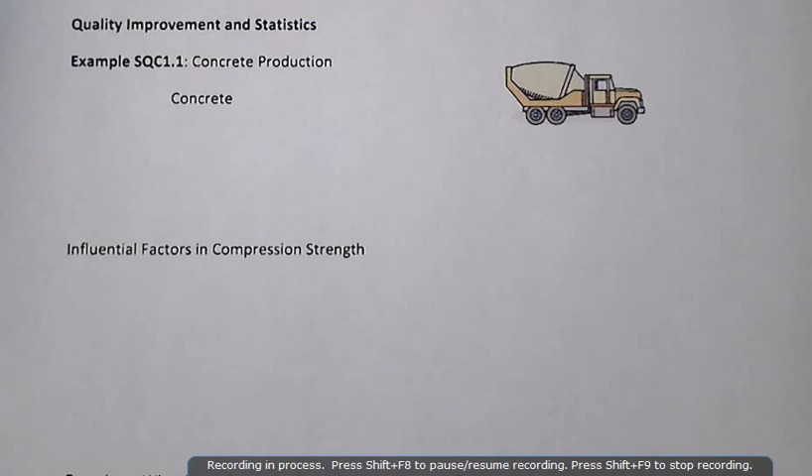We all want quality, we all think we deliver quality, but of course there's this big, great question of what is it, and can we all agree on it? And we tend to think that it's gold plating, and we're going to find out that from an engineering and management kind of perspective, that that's not actually at all what quality is.

We're going to get into how we use statistics to improve quality by looking at another area that has a lot of misnomers and a lot of misconceptions, and that is the production of concrete. To get there, because you're not all concrete materials engineers, we need to talk about what exactly concrete is and what it isn't, as well as introduce some of the areas where we have significant variability that comes along from the standpoint of natural variability, as well as variability that's really associated with man-made causes.

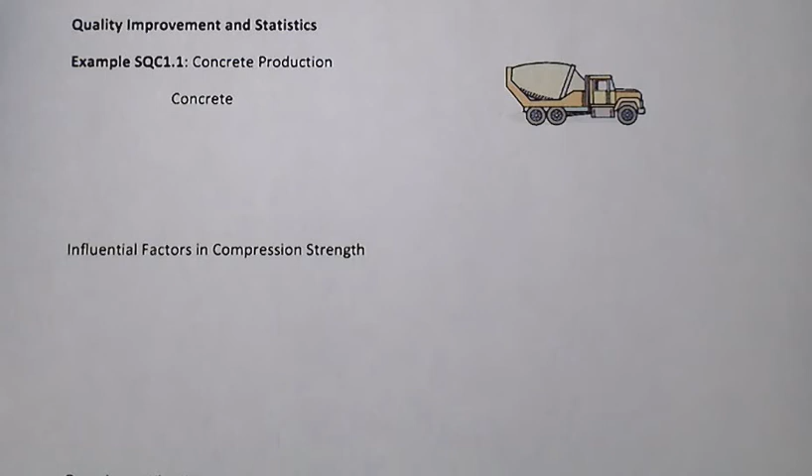And that paradigm is going to actually be pretty important for us as we not only talk about statistical quality improvement, but when we get into the next module, which will be analysis of variance, that'll come back as a pretty strong, important component as well. So let's talk a little bit about what concrete is, and that's going to lead us to a little bit of what it's not. An important aspect about concrete is that it has 4 primary ingredients, and really it needs 2 at the very heart of it, and that is cement and water.

Now, people on the street, so to speak, pardon the pun, will say, "Oh, I skinned my knee on the cement." The reality is that no, you did not. You skinned your knee on concrete. You cannot skin your knee on cement, and that's because cement is a powder. When we say cement, we almost are always talking about Portland cement, and Portland cement concrete is the combination of cement and water that then also has a whole bunch of what we call aggregate, as well as these days almost always some set of what we call admixtures.

The cement is essentially like a flour. The approximate analogy you can make is making a cake here.

And if I had anything better than my horrible high school French accent here, I would go into my French chef. I could probably do a Swedish chef better than a French chef here.

And so the cement is a lot like flour, and in many ways does the same thing in its combination with water. But it's only an approximate analogy here. What really is happening is that through what's called the hydration process, the cement and the water react in an exothermic reaction, generating quite a bit of heat, which as a part of production of concrete is important, particularly when we get to the construction site, and if we're dealing with mass concrete, that's a very important issue.

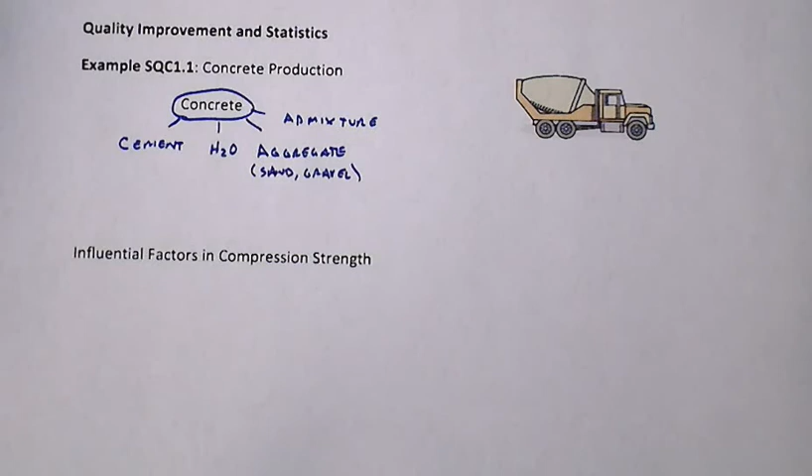But a little bit unlike the cake analogy, we put a whole lot of aggregate, which is just a general term for the sand and gravel that we put in there, that although it has some other properties for us in terms of stabilizing the mix and also providing some strength to the final product, it really, at the end of the day, is inexpensive filler, or what I like to say, it's dirt cheap.

Yes, that was a bad pun. A lot of people will call sand and gravel dirt. It's only dirt when it shows up on your parents' kitchen floor and it's tracked in, but out there in the world, this is aggregate, and it's not dirt. Dirt's a 4-letter word, and sand, yeah, I know, it's a 4-letter word too, but it's a good 4-letter word,

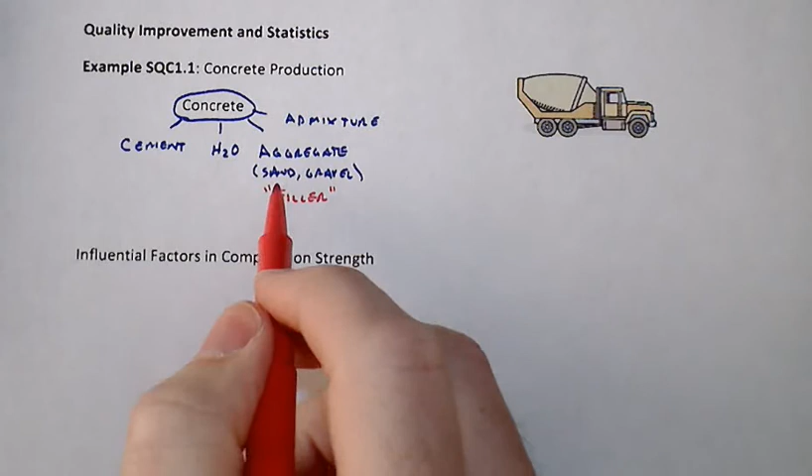and particularly because it's inexpensive filler, because Portland cement is quite expensive to both produce and to provide into this particular mixture. The cement and the water are going to combine to make concrete that is holding all this other stuff together. Now the admixtures here are essentially your spice that you add to your cake.

We do all kinds of different things. It might be a coloring admixture. There are all other kinds of admixtures that are there to speed up, say, the chemical reaction, speed up the strength gain. There are also sometimes what are called superplasticizers that help to make all of this conglomeration, instead of like a thick viscous peanut butter when it gets delivered to the site, a lot thinner, and being thinner means that it is easier to work with.

But there's a sacrifice that comes at the cost of oftentimes making something thinner, and certain superplasticizers can do that without having that disbenefit that we'll talk about here in just a moment.

Right, so it's important for you to not sound like just a common garden variety person on the street. When you walk across, roll across, live in structures that are supported by concrete, you can hurt yourself on concrete, absolutely, but you can't skin your knee on cement. You can only skin your knee on the concrete.

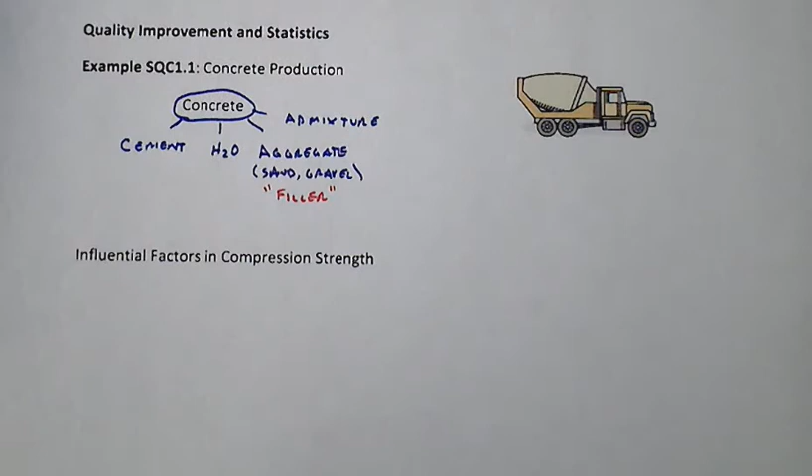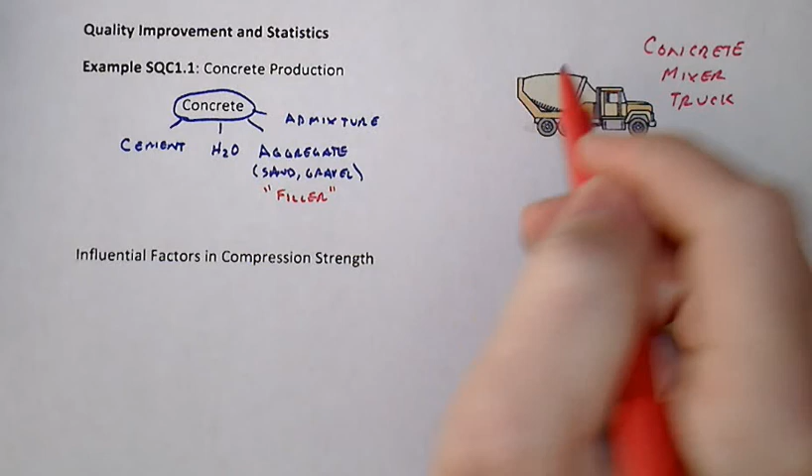It gets delivered to the work site, by the way, of course, in a concrete truck, right? Not a cement truck, but a concrete, and sometimes they call it a mixer truck. This one has rear discharge. Some of them have front discharges over the cab, and this is a rotating drum to keep that moving around. That's really not where we produce the concrete, although it is possible to actually do that, to do a dry mix, add the water, and do the mixing in there, right?

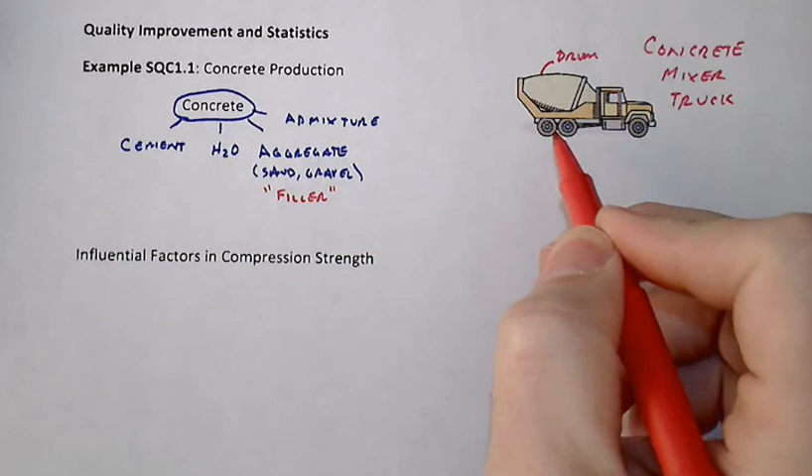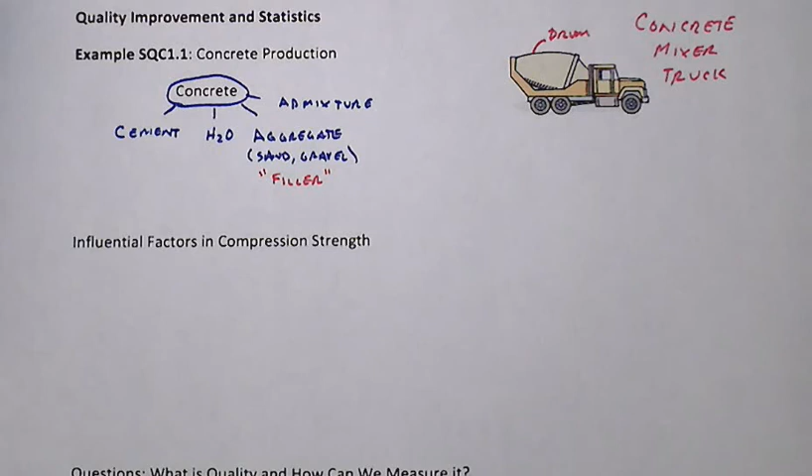And some of the crucial factors, and they relate directly to the so-called quality of the concrete, the influential factors in the compression strength, the most dominant and primary one is that ratio between the water and cement. Now, these days there's supplementary cementitious materials other than Portland cement that we might use, and so if you're really deep into this stuff, technically we talk about the water to cementitious materials ratio, but it's the same idea here. Water to cement ratio, based typically on weight.

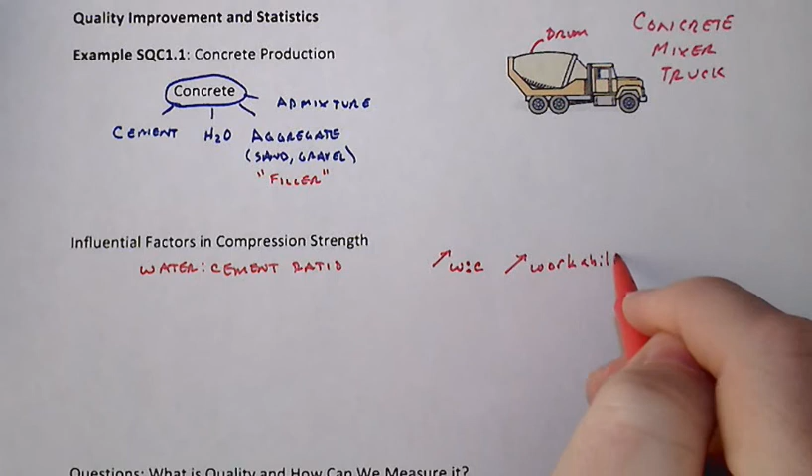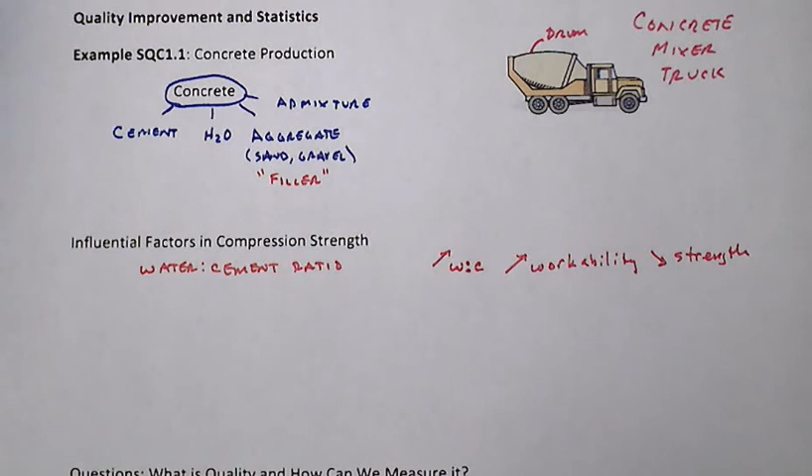And the yin yang that happens here is that the construction industry wants the water cement ratio to increase, because with it you get a thinner, more fluid-like mix, and so therefore you increase your workability. Unfortunately, you significantly decrease the strength, as well as a lot of other both mechanical and physical properties that are of desire from the engineering standpoint.

And so because of that, your theoretical perfect water to cement ratio for a lot of applications is about 0.33. Unfortunately, that has very difficult workability constraints, and so more practically you might be on the order of 0.4 to 0.45, and maybe upwards of even 0.5, without regard to what happens with admixtures. And with certain admixtures, you can pull your water cement ratio down to 0.33, but have the workability that's closer to 0.45 to 0.5.

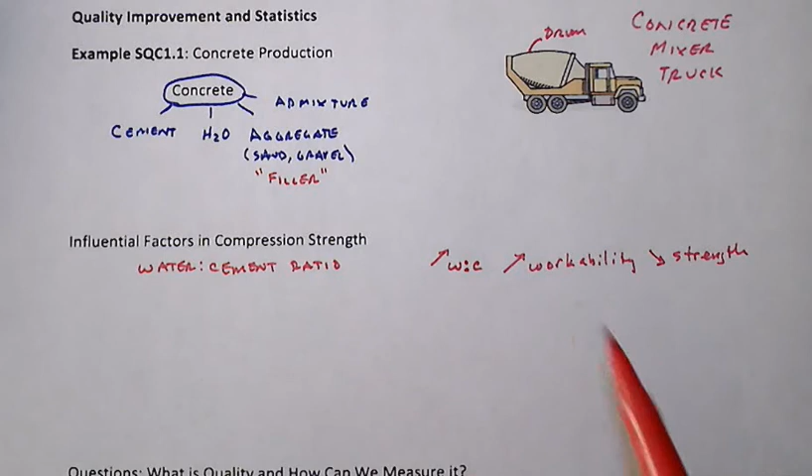And what that means, from a practical standpoint, is that your typical fluidity that you have on the job site is such that your typical construction worker will talk about pouring the concrete. And classically, we don't like that as engineers at all, because if your concrete is so thin that you can pour it, that usually means you have way too much water and subsequent problems with the strength as a result.

It's a classic case where the workers will have the concrete delivered to the site. They will see it as being too thick and not workable, so as it comes out of the chute, they'll add water, and that just destroys the quality of your concrete as a result. So you try to be eagle-eyed on the inspection, make sure they don't do that sort of thing.

Okay, the other influential factors here are the aggregate properties: you are very interested in what their absorption of water is and what the water content is during the production process. You have two kinds of things. If you had a bone dry aggregate that you threw in, some of that mix water is going to get absorbed into the aggregate pores, and that means that's water that's not available for your hydration. You can get too little water available, and not only do you have workability problems, you won't have complete hydration, and that becomes an issue.

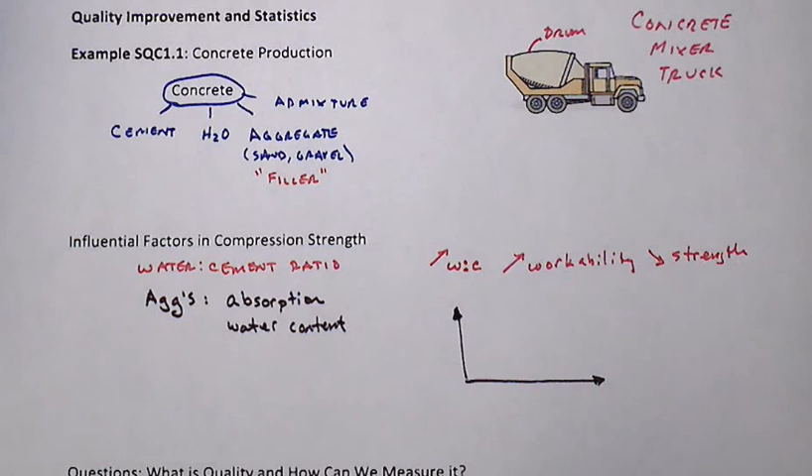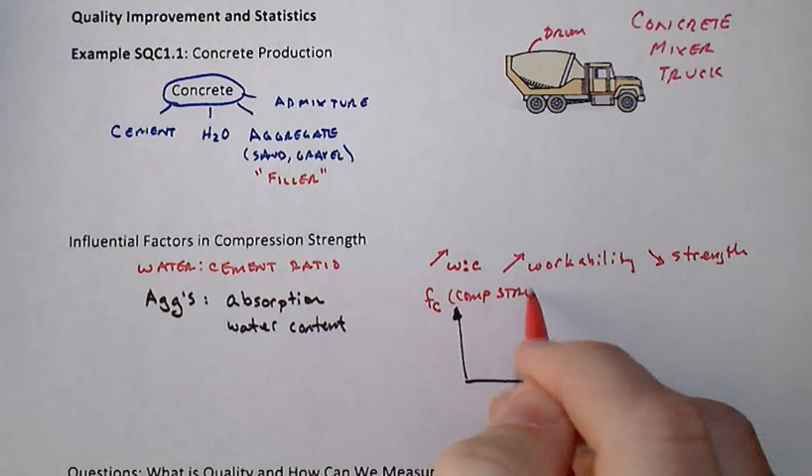From a time element standpoint, another huge important aspect is that the properties of concrete are just like a cake, that they change in time. And the slightly different aspect of that here is that we're talking about a time scale of days, and really eventually and ultimately years, that if there's sufficient water around, the compressive strength of the concrete, that I'll label as f sub c, is going to be a function of time, and it will continually increase if there's sufficient water around. And it increases quite rapidly at the beginning and then will eventually level off.

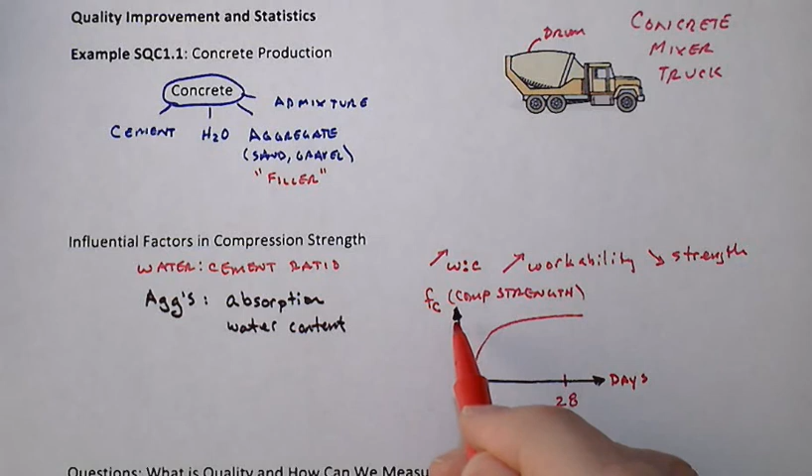But even though the characteristic important time frame is usually the 28-day, you can get about an additional 10% strength increase over, say, 28 years. So it will continue to gain strength, and from an evaluation of existing structure standpoint, that is an important aspect to take note of. Right? From a design standpoint, this 28-day strength is a common target value that we're using, and in somewhat made-up notation, I'm going to call that f sub 28.

The 7-day time frame is also a typical important time frame, and that 7-day strength will be somewhere around 0.7 to 0.9 of the 28-day. That's not a minus sign, that's just a dash to indicate the range. It's more commonly, in my experience, been around 0.9, 90% of that. And again, the whole critical issue here is that you can monitor, measure quality, try to predict what's going to happen in the long term by measuring something in the short term. But 28 days is our key design value, and it's very important to understand that the strength and quality of concrete is a function of time as a critical influential factor.

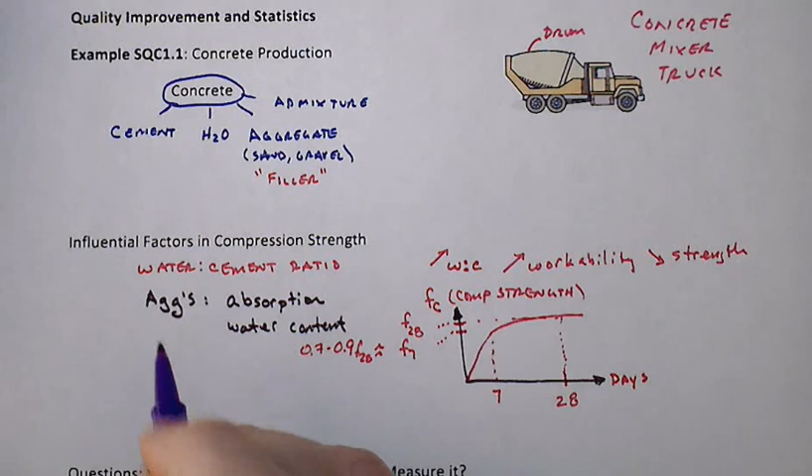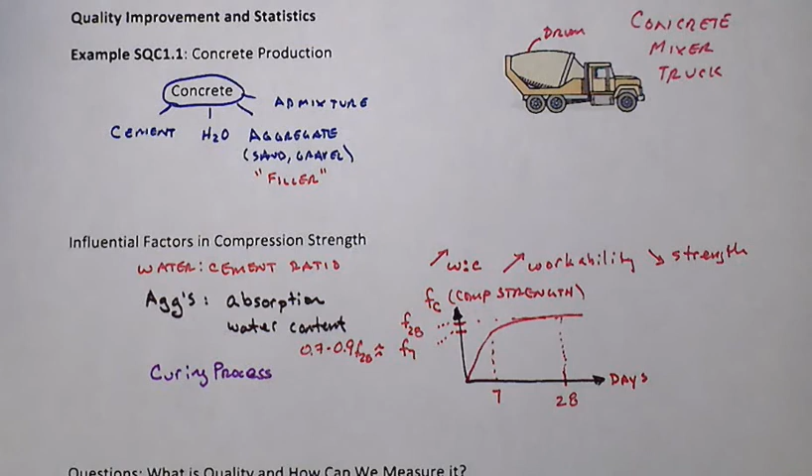And then one more before we get back to a larger question of what is quality and statistical quality control and the techniques that we're going to work with in this course, is that the curing process is also one more important aspect. Go back into our cake analogy. The temperature at which you bake the cake is going to have a significant influence on what happens to that cake, the rising of it and the pores that are created as the gluten reacts and creates the sponge-like texture. Well, the curing process is sort of like the cooking process, although we don't cook the concrete. It creates its own heat all by itself. The curing process is really all about maintaining hydration or maintaining available water.

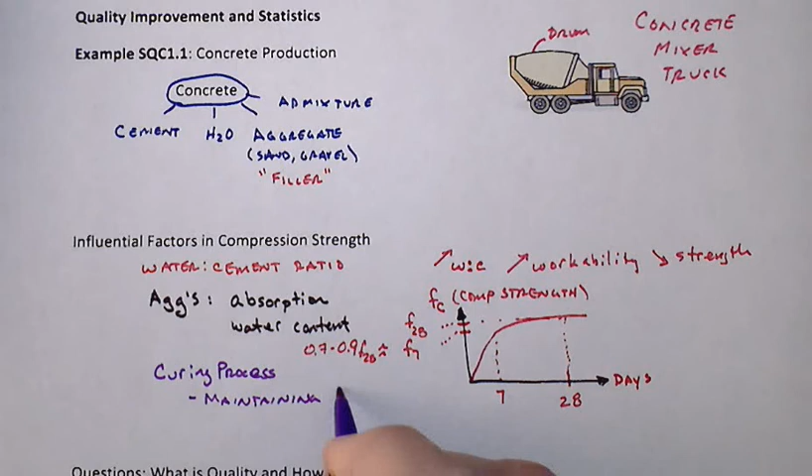And so what you'll see in particular with these specimens that we're going to pull out for our sampling is that we'll actually keep them submerged in a tank of water, and that way they for sure have available water to continue on. Now that in itself is going to be important, because how we do the test is not necessarily reflective of what happens out in the construction. So the testing itself is going to be only a potential representative of what's going on out in the field.

But out in the field we have all kinds of curing methods, and they include setting up misting operations or fogging operations, where we spray water over the concrete as it goes through this process of gaining strength over time. Sometimes you put wet burlap down, other times there's visqueen or plastic barriers that are put down. But maintaining the water is very important in this curing process. Once the concrete sets up and begins to harden, then you add water, and you're not going to create problems with the water cement ratio. You're just providing enough water so that you don't have the surface dry out and consequent scaling and other quality issues that result.

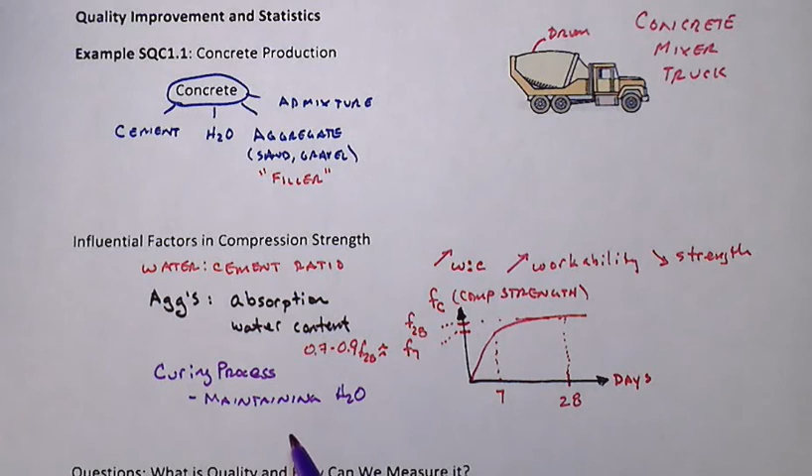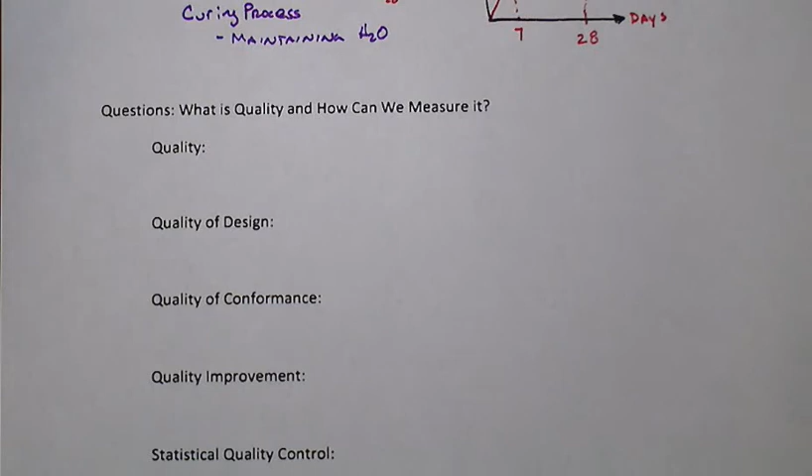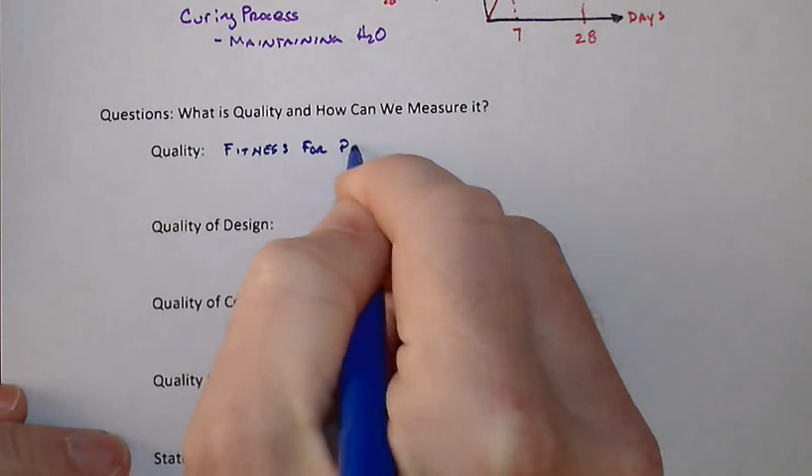And so a bigger question here then is exactly what is quality and how can we measure it, and coming up with some sort of more definitive way to measure it. When you start getting into the details of each field, there are going to be different specific measures of it, but there are some generalities that we can find that go beyond just the manufacturing area and also into the service industry, whether that's management services, banking services, or a specific manufacturing process. And one crucial idea is that fitness for purpose is what we're really talking about when we mention quality. This is not about gold plating.

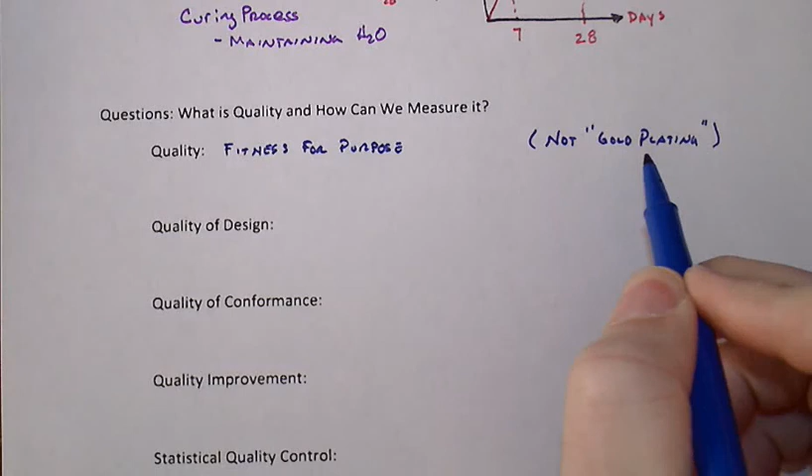And so a lot of times your typical person thinks that this is just unnecessary kinds of things that are happening. It's just somebody wants to live in a gold paradise, or in their high definition entertainment system, they're going to go get the gold plated HDMI connectors, because they've been told that that's better, right? There's a marketing thing there. Well, it actually turns out that in that specific case, the gold plating does actually have a benefit in terms of the engineering function, right?

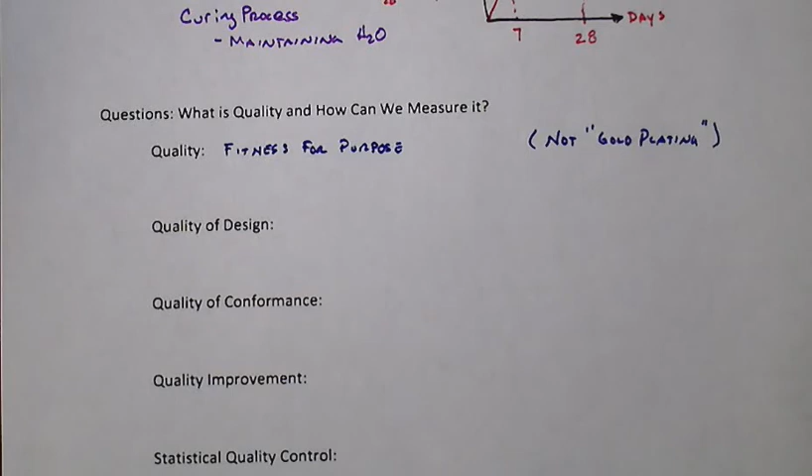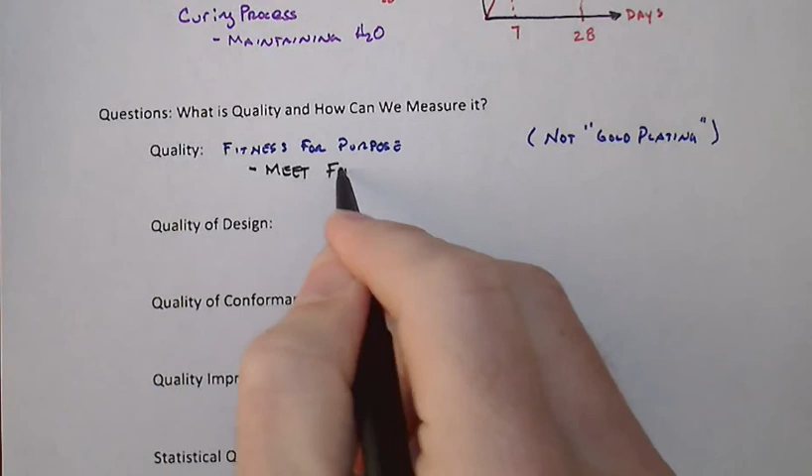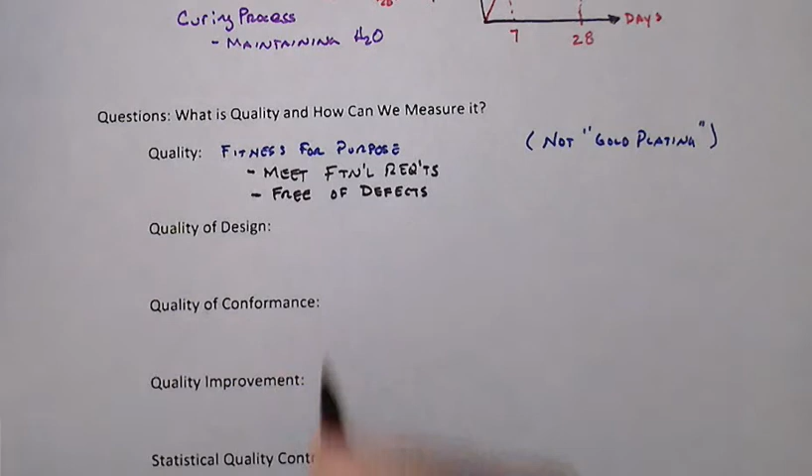And so that's an important aspect about this fitness for purpose, is that we're trying to meet functional requirements, right? And so, yes, in some instances gold plating does bring with it higher quality, but this is not necessarily the difference between giving someone a cubic zirconia engagement ring versus a diamond engagement ring. This is about specific, actual, real functional requirements, and also a notion of quality is the notion of freedom of defects. And so we can talk about lower and higher quality being maybe not free of defects, but the number of defects or the rate of defects is some aspect of quality.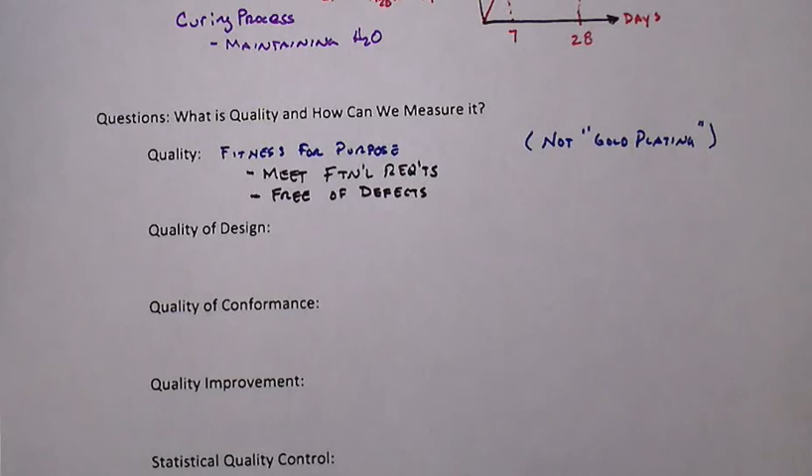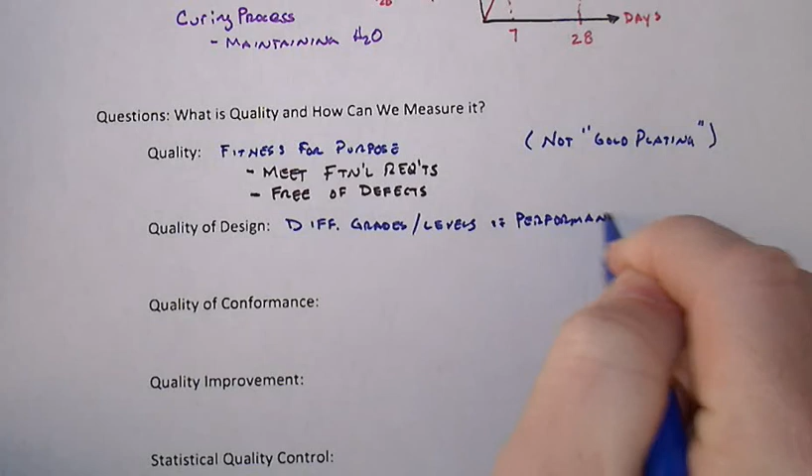Now, two other ways we can begin to break down quality are between quality of design and quality of conformance. And by quality of design, it really relates to this first aspect here about meeting functional requirements. And so as we're going to take a marketing idea, a market analysis of a potential product, and translate that into tangible engineering guidelines and designs, then we think about different grades or levels of performance, and in particular we start getting into also reliability and serviceability,

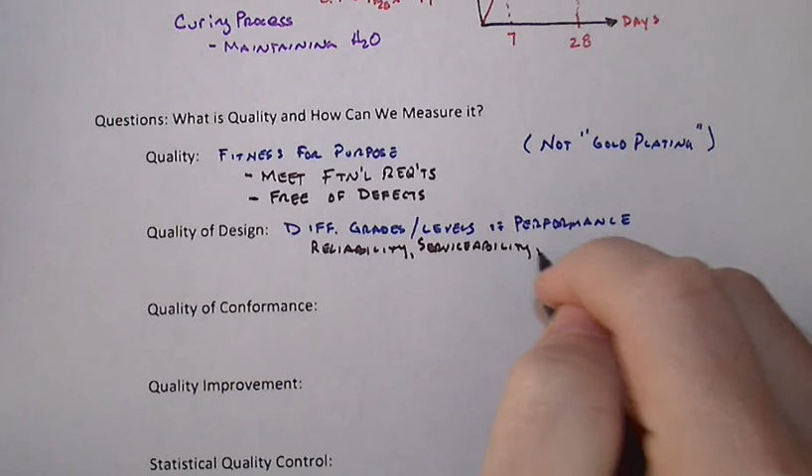which in my world relates to things such as if I walk across a floor and I create a lot of vibrations, so much so that even though there's plenty of strength, you end up creating irritation amongst other participants or users of the facility, then those vibrations become a serviceability problem. And if you have a building that has enough strength but can't be leased because of excessive vibrations, then you have just as much of a failure as if you had some sort of a collapse or partial collapse, right? And so different grades, levels of performance, reliability, serviceability, and function.

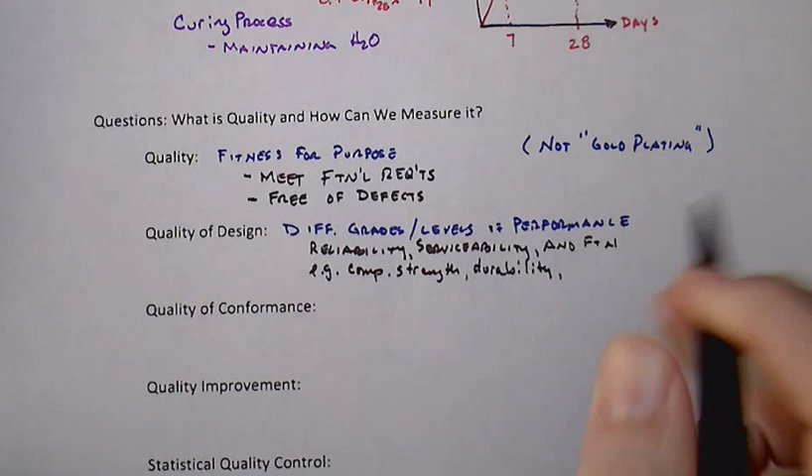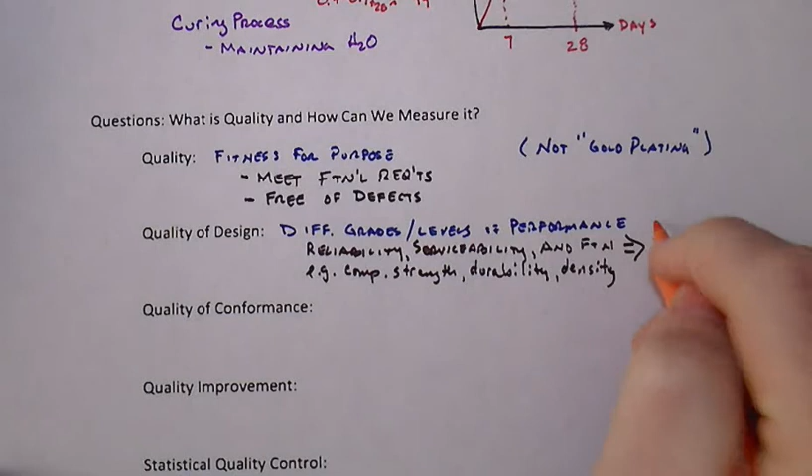For example, we might be talking about the necessary compression strength, might be talking about durability, ways we quantify that, might be talking about physical properties such as density. Each one of these is coming right out of the concrete world, but it is more general as well to all kinds of materials. And really ultimately all of these are things that we make deliberate engineering and management decisions about.

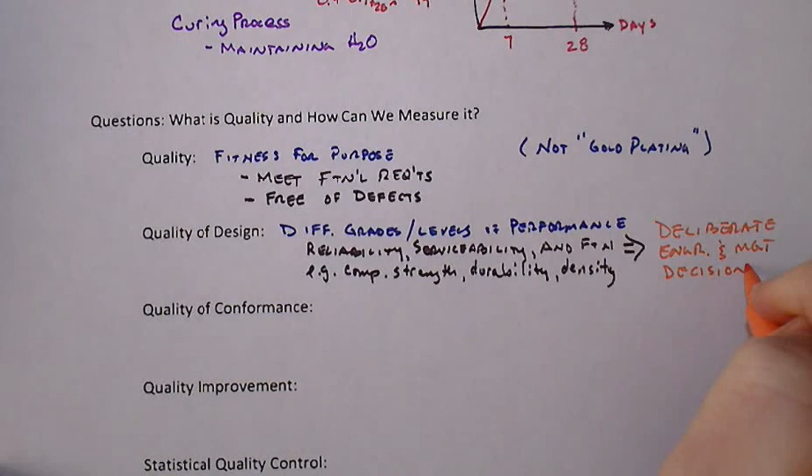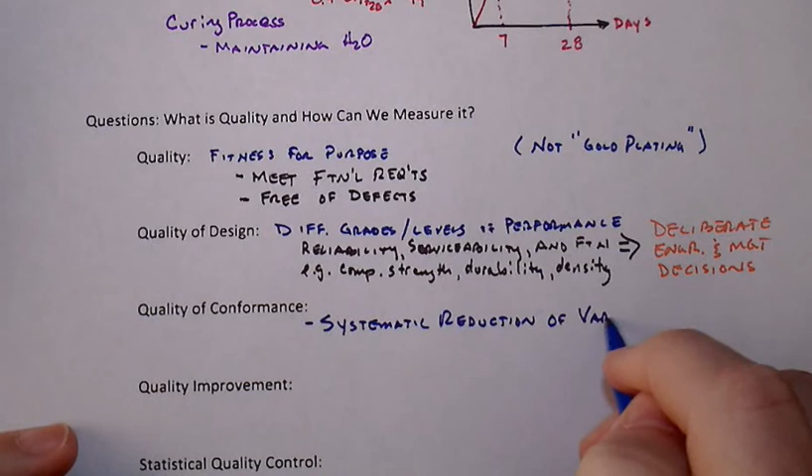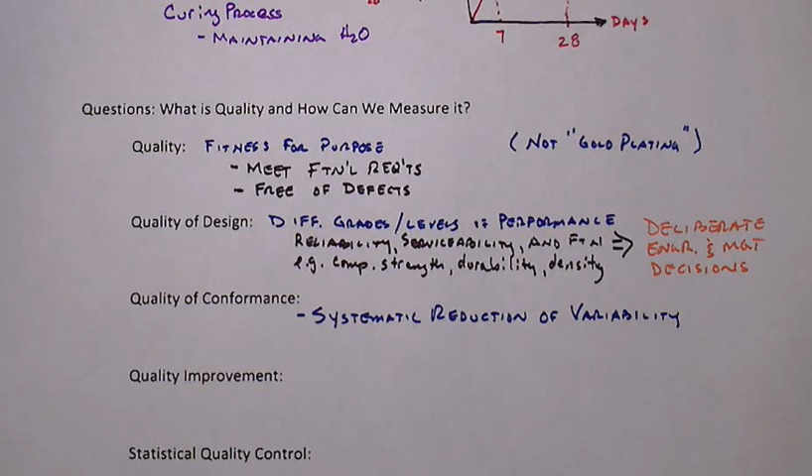And now another aspect of quality is this notion of quality of conformance. And one really crucial aspect about quality improvement is the systematic reduction of variability. Now again, in my world as a structural engineer, I'm usually designing one-of-a-kind structures. But when I select a steel member or I'm ordering up a certain concrete, I'm expecting that the producer is going to be able to provide that product with a certain reliable set of material and mechanical properties, right? And so that reduction of variability goes to the consistency of the product. And so something that's of higher quality you would associate with less variability, right?

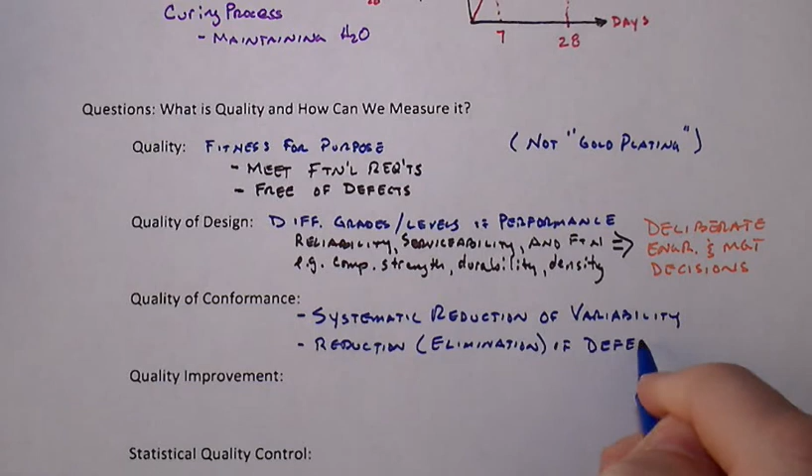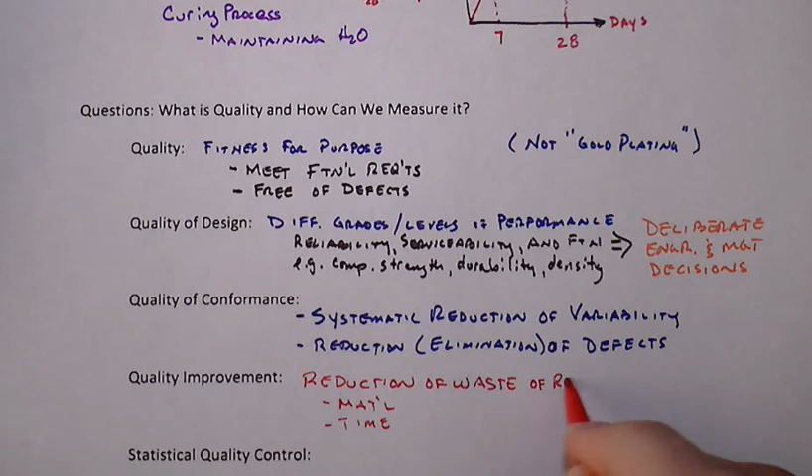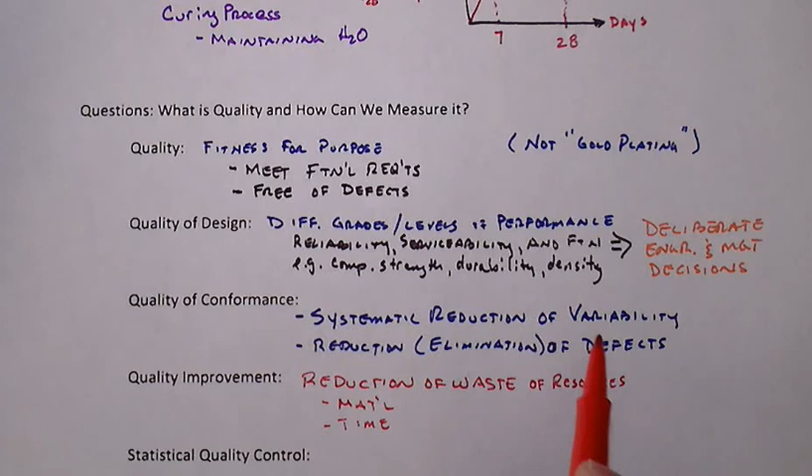And also we would associate a reduction or even elimination of defects. Now we're going to get more precisely later on into a specific definition of what is a defect, so we'll just leave that hanging out there for a moment. Right, now quality improvement as a whole is about the reduction of waste, and that might be in terms of both reduction of material as well as time. I really like to think about this as reduction of waste of resources, and resources are more than just tangible things, but time is certainly a resource. And reduction of variability goes hand in hand with this, that with something that's less variable, we can be more efficient, and if we're more efficient, then we are reducing waste.

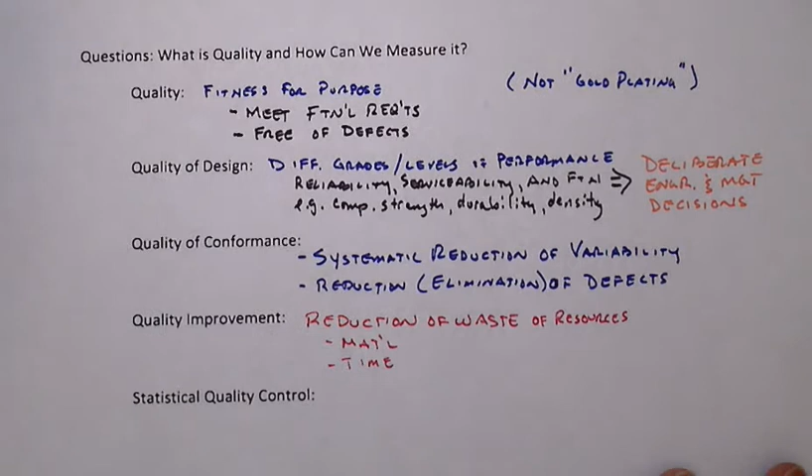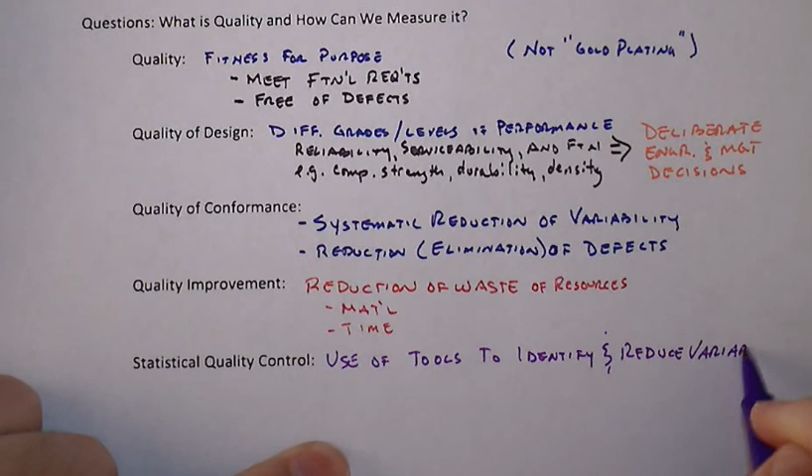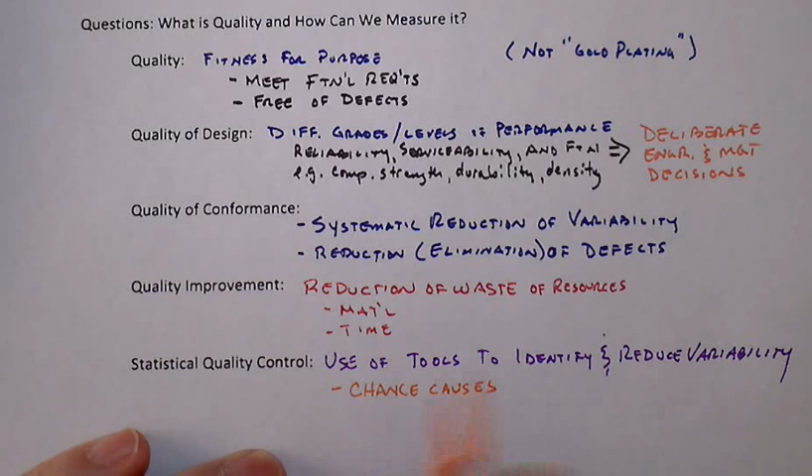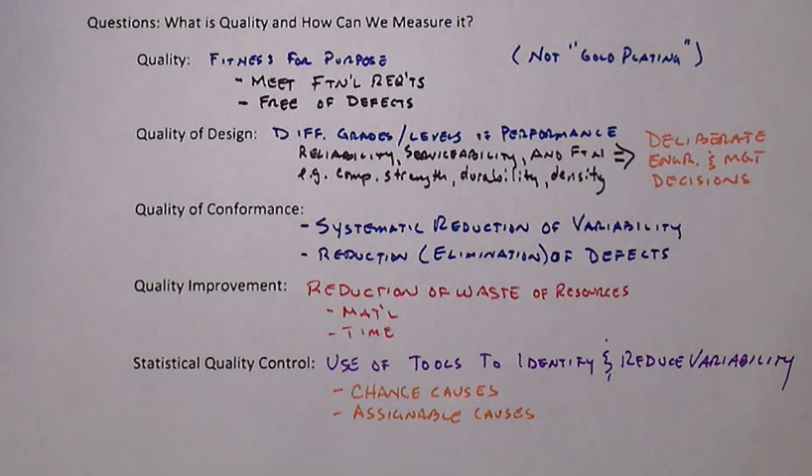And so finally, for where we're at in this particular module, is to start thinking about statistical quality control, which is really the use of statistical tools to identify and ultimately reduce variability, at least those aspects of variability that we can reduce. And so broadly speaking, there are two different causes of variability. There's chance causes, and there's assignable causes. And in another segment, we'll get into more detail about what exactly chance causes or assignable causes are. But that's going to be a particularly important aspect about variability and process control, and also product control, and when we get into analysis of variance, this division of things will come back into play as well.